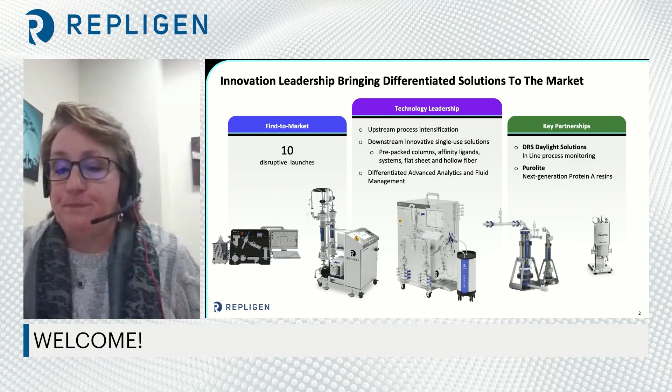Our technology journey has evolved to offer fully integrated solutions. We start with differentiated consumables, then add standard and custom flow paths that interface with differentiated scalable chromatography and TFF systems that ultimately include advanced analytical technology for process monitoring and control. This renders a complete integrated technology solution for both upstream and downstream biomanufacturing.

In addition, our technologies serve many markets, from traditional modalities, including recombinant proteins and vaccines, to new modalities, including cell and gene therapy and cultivated foods.

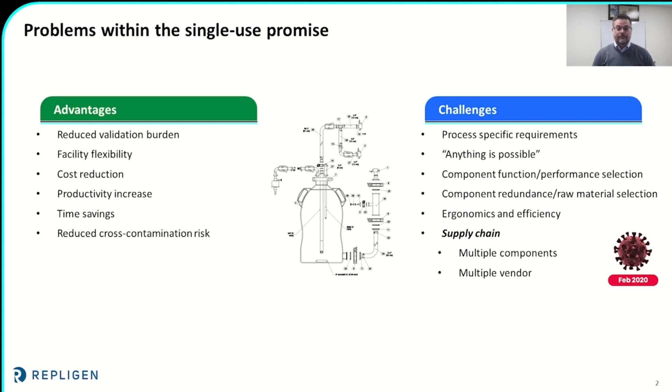In today's new world, if you look at the historical approach, how our industry took a look at solving some of these supply chain issues, they looked at vertical integration, one-stop shop. You come to me, you can buy anything your heart desires. It's all mine.

And that has some certain value for sure. That vertical integration gives some security of supply. As an end user, you only have one person you have to talk to when it comes to problems or those types of issues.

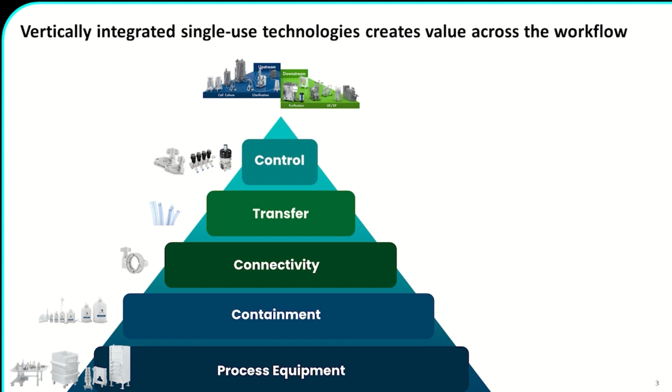But you're also painted into a bit of a corner, because that single source supply was exactly that. It was their proprietary technology integrated with their proprietary equipment. And you have yourself painted into that corner where that ship goes sideways in the Suez, or a pandemic breaks out, you have a hard time getting product. You don't have any wiggle room or any ability to pivot.

And I think this is where Repligen is taking a very, very unique approach to vertical integration of that supply chain when it comes to single use.

Certainly, we have the controls. We have the transfer ability with regards to our own extrusion. We have our own extruded silicones and our extruded TPEs. We have options when it comes to connectivity, both between flow paths and within flow paths. We've got options for containment, bottles, bags, and the like.

And then we fully support that in a bedrock, so to speak, of equipment that is uniquely and purposely designed to ease the deployment of those single-use items.

So that's well and good, and it's a definite value that we bring, but that's not all of it. Repligen has also taken the point of being more collaborative, flexible, and agnostic. And what I mean by that is open.

We'll work with you in order to identify some of these components, and we're not the only game in town. So looking at integrating perhaps third-party components into that bill of materials for your flow path adds a certain level of flexibility and security that we're taking to market.

So for the rest of today's talk, I wanted to break this down into three chapters. One, I want to take a look at what we can do for supply chain strength, and I'm going to use some examples of what Repligen does and why we're so good at it.

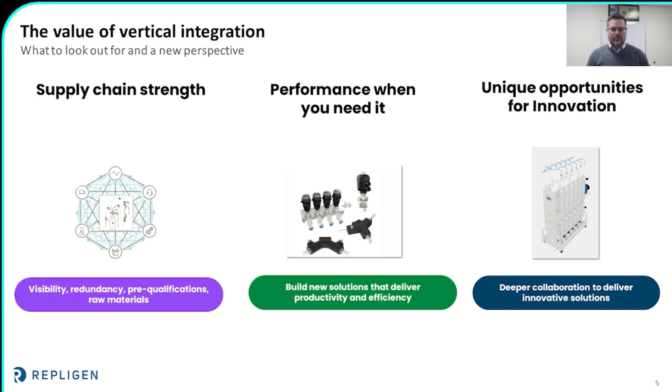So jumping into supply chain security, let's take an example of a mixing bottle. It's a fairly straightforward design, ports going in, ports coming out, pressure transducer, a pressure T, and a simple magnetic pill in the bottom for agitation.

It's a wonderful design that Repligen makes all the time. But if you look at it, there are actually 29 components in this assembly.

Each one of those components has to be evaluated for: is it the best for that particular situation? Are there alternatives? Are there availability concerns? What types of qualification and support documentation are available so that you can prove that interchangeability and be able to provide alternative options?

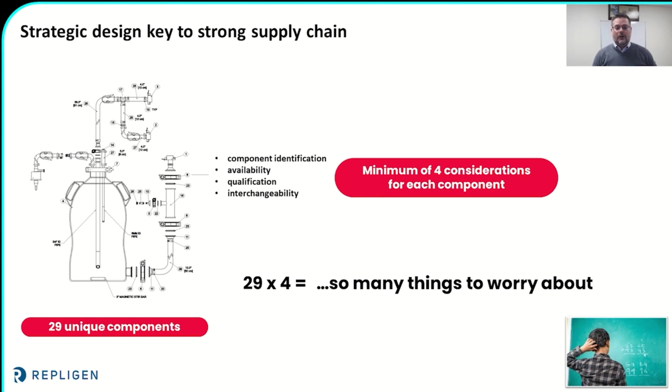So Repligen is taking the approach of being more holistic in that. We're coupling that open and agnostic approach. Yes, we have very, very valuable equipment and components that provide tremendous service to our customers for all of this. But again, there are alternatives out there.

So integrating that into a design, you could have a singular part number, and our processes are set up such that a bill of materials can identify alternatives all within that revision controlled system. So that burden of control is on Repligen as the supplier. You as an end user don't have to worry about it.

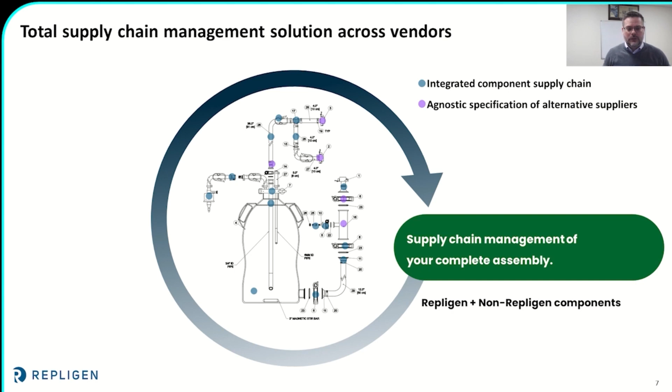So looking at a particular example, I'm going to pick on pinch clamps for a moment. They are certainly not the most sexy component out of the entire assembly. It's a pinch clamp.

But working with a customer, we're able to identify that as a potential problem point. I think we've all, in the past couple of years, if we're working with single use, gotten that phone call where your entire process is about to be delayed because of a pinch clamp. It's not the bag or the bottle or the filter, it's a pinch clamp.

So we identify that. Certainly that's part of Repligen's vertical integration. We own a pinch clamp factory. So we have that level of control, but we also have the ability within our system to specify a third-party pinch clamp as an alternative.

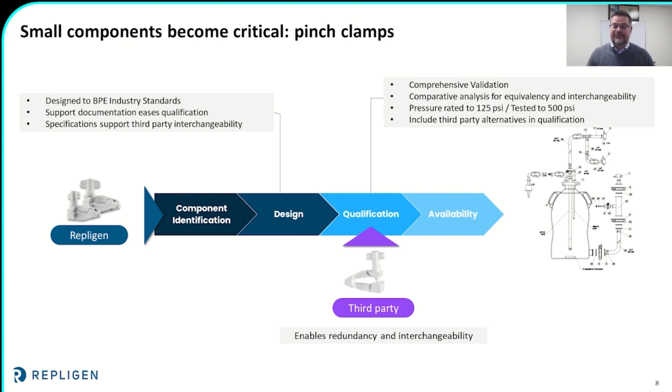We can help our customers with the comparative analysis of validation and qualification information to show equivalency and interchangeability, incorporate that into the design, all culminating in the end result of simple availability. Your product will get to you when you want it to.

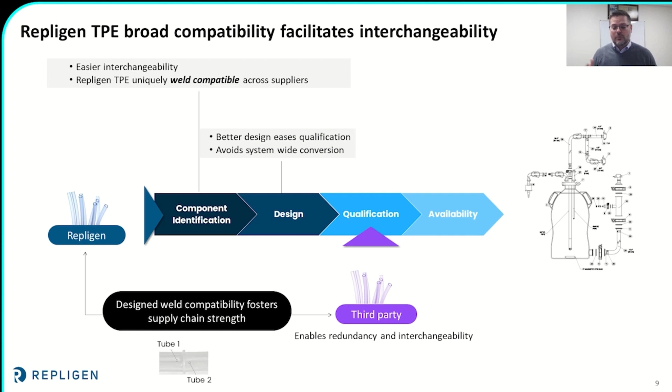So not only is Repligen's TPE fantastic, it's also compatible with everyone else's TPE. So if you are looking to build redundancy into a bill of materials and not completely overturn the other processes that you might have ongoing in your facility, this is the path to go.

Our TPE welds wonderfully to itself, but it also welds to all the other TPEs in the market. This offers a unique opportunity for customers to integrate that supply chain security, again, without having to undo all of the other qualifications of other tubings and replace everything. This can be done adjacent and cooperatively with existing systems.

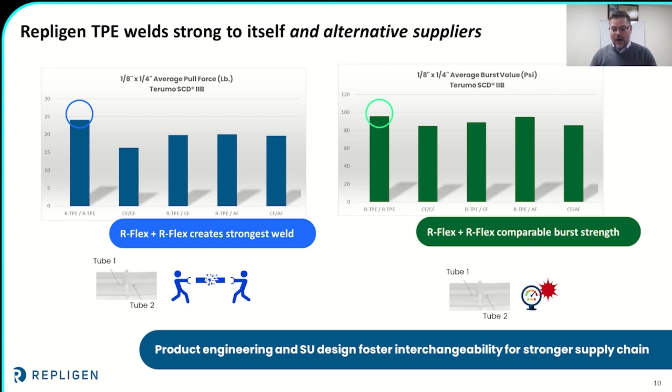So if we can pivot now a bit to performance. Again, like I said earlier, you might have a fantastic and amazing design that is very, very available, right? You've got security of supply built into it. It's a vertically integrated supply chain.

Everything's wonderful. But if you are settling, if your process operators have a hard time deploying it, have a hard time using it, if the risk of failure is higher, who cares if it's available, right? You are potentially putting in harm's way your own operators, or worse yet, the patients and people that we help making therapies that we all make.

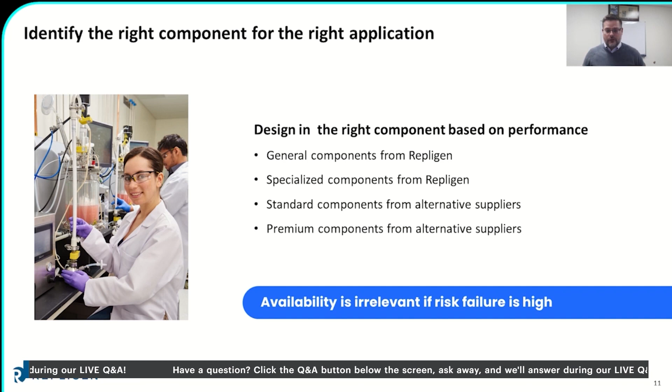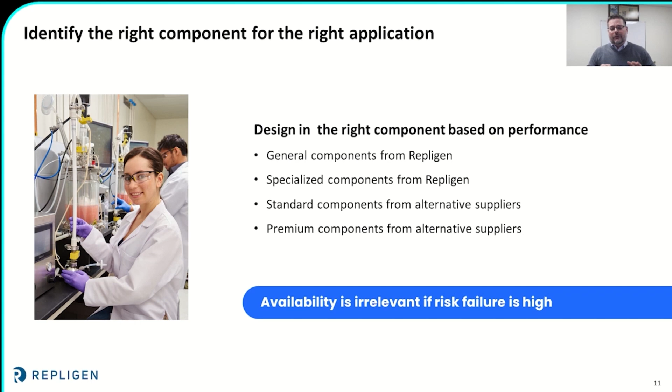An example of building performance into a design, I'd like to use a sterile sampling assembly as an example. There are a lot of different considerations when looking at a sterile sampling assembly, right? The container, is it a bottle, is it a bag? The connectivity to the source, what type of aseptic connector are we welding to it? But for sake of time, I'd like to simplify the conversation and look at two facets.

The first being the interconnectivity within the assembly. Each junction could be done one of two ways. One way is zip ties and barbs. It's a very economical method of making connections. With just a few components, you can make 10 billion different permutations. It's a rapid way to pull a design together. It's a very cost-effective way to pull a design together.

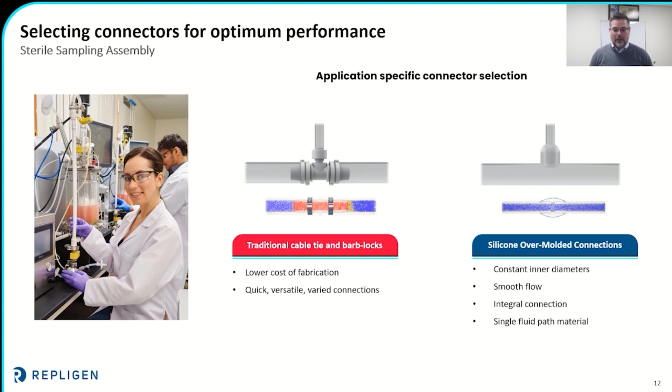For those processes that are a little farther downstream, a little higher value, you could always use silicone overmolding. In that, you have molded junctions, no mechanical connections, and that has its own values. One single flow path, completely smooth, one material, all silicone, so you don't have to qualify multiple materials, and it's integral. There's no mechanical connections. Both options have value, and a properly integrated supplier, like Repligen, can offer you both.

The second facet that I'd like to look at is flow control. I don't know of anybody that goes to pull a sample and just welds it on, opens the valve, and lets it flow. There is always flow control within a sampling manifold. You can accomplish this in a couple of ways as well.

There are, again, the very simple pinch clamps, more of a guillotine style. And the pinch clamps that Repligen provides are very wonderful, fully qualified, characterized, pressure rated. They can come with colored knobs so that you can coordinate your operating procedures. Say, turn the orange one till full, open the green one. And they bottom out, which means you can't over torque them and damage the tubing.

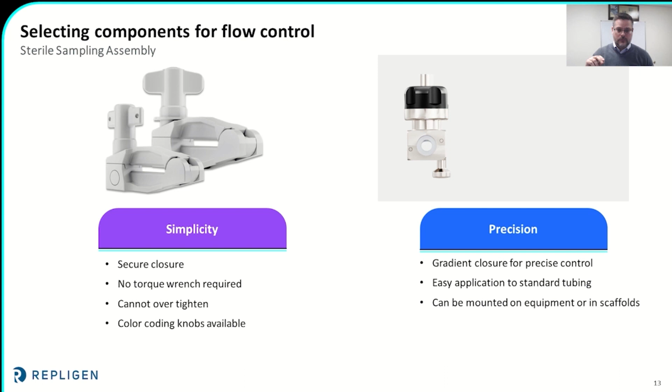You could also look at something with a little more precision, like the ARTeSYN pinch valves. In this, you've got more of a stainless steel body that clasps around the tubing and provides a very precise gradient control. Those can be automated as well. You could do a fully pneumatic system if you'd like.

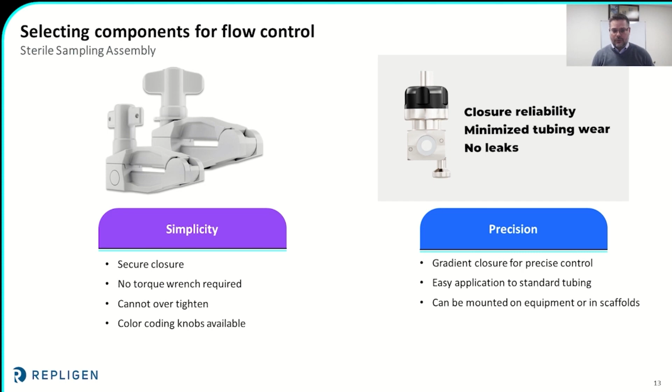Now, separately, they're important considerations to take when pulling your assembly design together. But working with a supplier, integrating those two is where the real value comes. You could take those flow control mechanisms, whether it's the pinch clamp, the guillotine clamp, or the gradient clamp, couple that with a silicone overmolded trunk.

Now you're able to make your pinch closure between samples directly on those junctions, eliminating dead legs. Couple that with the color coding and the potential to automate, you now have an option for sterile sampling that is secure in supply, but also secure to use.

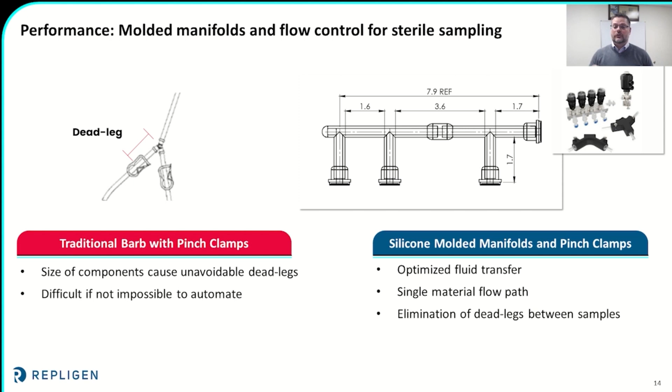So for our last section, I'd like to go through a case study, which I hope ties a nice bow on this and shows some of the capabilities of what a properly vertically integrated organization can do for you. So in this case study, folks come to us where they have rather extravagant filtration manifolds that they're trying to pull together. So in this particular instance, there were 24 filters, 12 filters and 12 pre-filters.

The customer is trying to evaluate, do I go with more of a traditional stainless system? Can I make this a single use? How in the world do we handle 24 filters that are all greater than 20 inches long, manifolded together? How do we handle that? How do you control it? And how do we secure the supply chain? And I'm going to show you how.

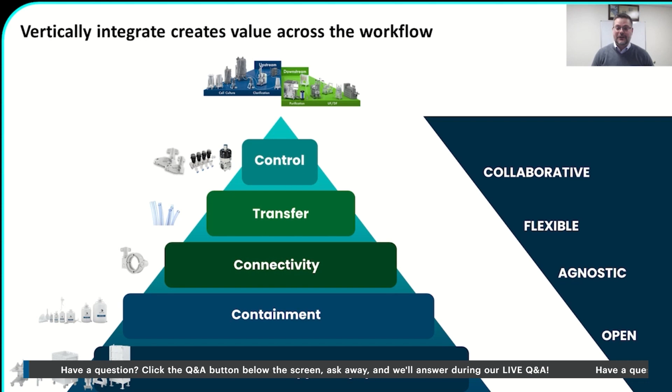So again, utilizing a properly integrated supply chain, let's say maybe not even properly integrated, but a properly executed vertically integrated supply chain, you can bring some very, very unique value. So we started with the flow path itself, making the system modular, looking at the connectivity between those junctions, identifying alternate connectors such that if one aseptic connector is no longer available, there are alternatives that can be substituted, and making that less of a kraken, less of an octopus, and more of something that is more easily handleable.

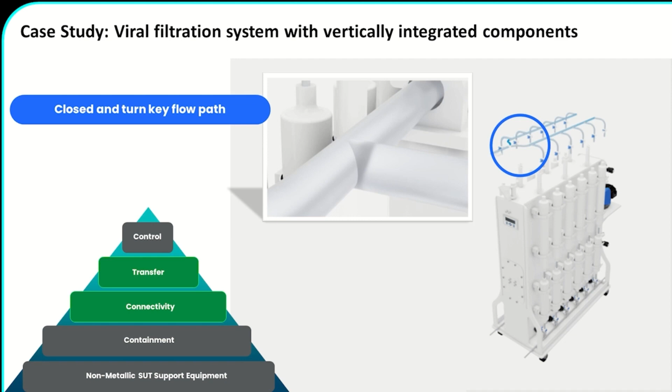So it can be manufactured with accuracy and without error. It can be packaged and irradiated and shipped without error. And it can be opened and deployed in a clean room onto an environment without error.

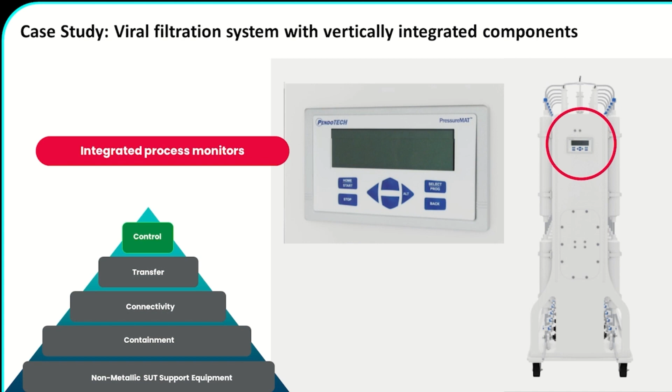We also integrated controls, process controls. And I bring this up because this is an example of we don't live in a perfect world. And so there are some technologies out there that are extremely proprietary. They bring a fantastic value, but again, in a properly executed, vertically integrated organization, you've got some controls in place, whether it's relationships with those industry technologies, inventory control. There are many ways that we can accomplish that.

We were able to integrate pinch valves, more automatic pneumatic pinch valves, to direct flow control. So this was in the event that one filter fouls, it could be automatically and immediately isolated, thus improving the safety for the operators, no blown lines, improving the efficacy and ergonomics of the system so that you don't have to worry about lost product.

And there's another value here from a supply chain perspective. These automatic pinch valves are permanently affixed to the platform, which means you don't have to buy them every time. They simply clamp over the tubing. So we were able to eliminate a component from the bill of materials of the flow path itself, lessening the cost of the flow path, increasing the security of supply of the flow path, and integrating that into the platform itself.

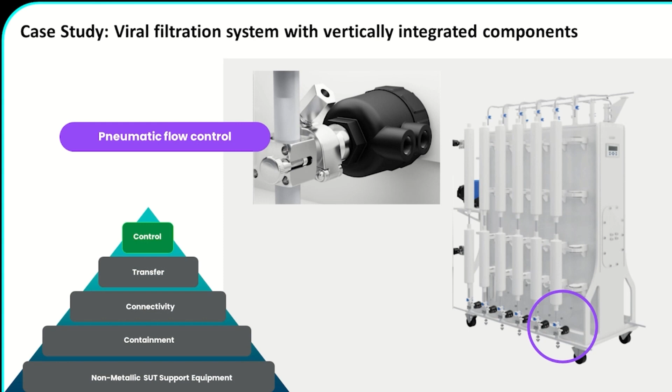So with all of that, at the end, great, you've got the controls, you've got the monitoring, you've got the flow path. What do you hang it on? You put a couple of nails in the wall and hang it up like a picture? So what we were able to do is work with the customer to come up with a custom platform. We had a specific footprint that we had to be in. We had a certain layout and height restriction for operator and OSHA requirements.

So we were able to design a cabinet and racking system that housed everything. The monitoring systems, the pump, the electric, pneumatics, everything, all self-contained with a simple data connection to the wall controlled by DeltaV. That is pretty cool in itself, but there's more. This whole system was made out of polypropylene.

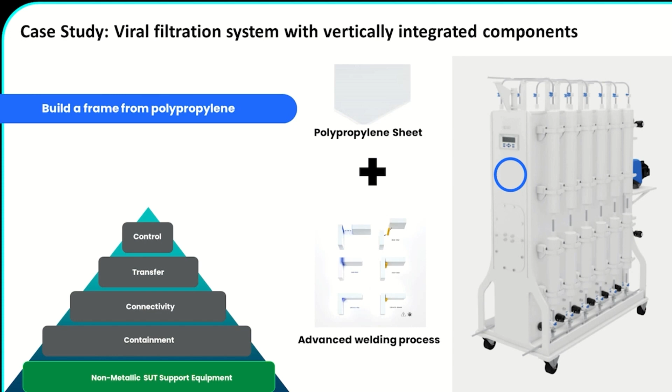So working with a polymer like polypropylene gives you a lot of advantages. One, polypropylene is very abundant, so you don't have to worry from a supply chain perspective on that. It's fairly secure. Two, fabricating with polypropylene, you can do almost anything. So being able to accommodate geometries and retention features for the filter and the tubing was extremely easy if we were to compare it to doing the same thing in stainless steel.

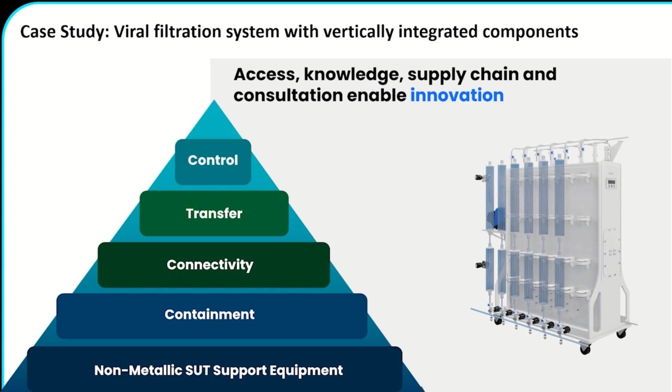So in the end, our customer received an entire system properly executed through a properly controlled vertical integration supply chain. Full security on the flow path, full security in the deployment of that flow path, and full security in the operation and final use of that flow path.

So to close out, you're probably asking yourself, boy, that sounds very, very fun. How can I get on board? Well, simply reach out to us. We have experts in all four corners of the world, and our design team is standing at the ready. We have, at this point, between flow paths and equipment, well over 6,000 designs. So I certainly would challenge anyone in the audience to throw us a curveball. We definitely enjoy the challenge. It's a pretty good chance we've seen it already.